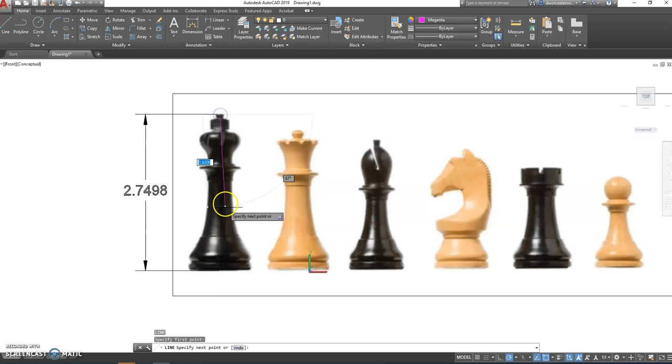So I went out to the internet and I just typed in chess set, and this is a pretty standard chess set. So remember your max height is 2.75 inches. So I scaled this to approximately 2.75 tall. And I'm going to come in here and just draw a line right down the middle of this. That is that 2.75 inches tall. So 2.75 to there. Now remember, the maximum diameter of this is 1¼ inches.

So our radius has to be less than 0.625. So right there, I am less than 0.625, so I'm just going to go to right there and draw that first piece in. Now, the next thing to remember is your fine detail is 0.05 inches. I'm just going to offset 0.05 to see what that looks like. I'm not selecting my right line. I got to get rid of this dimension. I'm going to offset the 0.05 up. And notice how small that is. Oh, wow, I'm way within specs there.

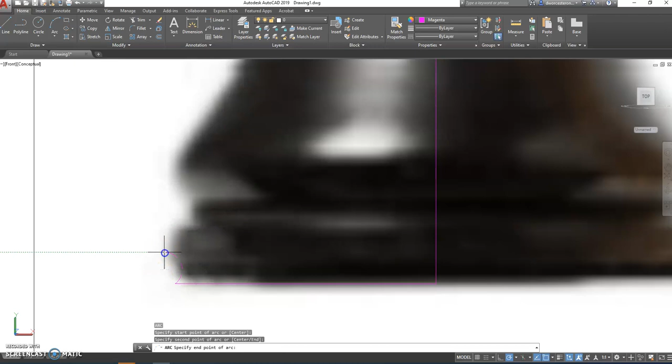So I can just go ahead and start drawing this thing, put a little arc there. It looks something kind of like that. I'm going to add in another arc. Looks something kind of like that maybe. I'm going to draw another arc. Come up to this section to here. Here it looks like it has a little bit of a flat spot on there. So I'm going to put a line across to there. Put in another arc up to maybe about here.

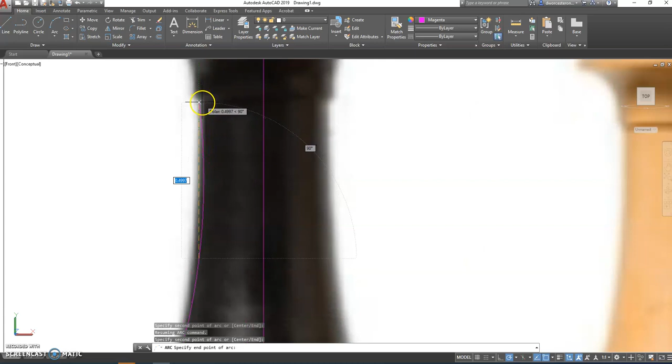Again, looks like a flat spot there, so I'm going to put a flat spot in, and then put another arc in. Maybe something about like that. Here looks like a flat spot again, so I'm going to come up, out to about there. Here, I'm going to offset again that 0.05 just to see. And wow, that looks like it's about the appropriate size. I maybe didn't go up quite tall enough there, but that's okay. I'm going to go ahead and fillet these two lines so it rounds off that tip of it.

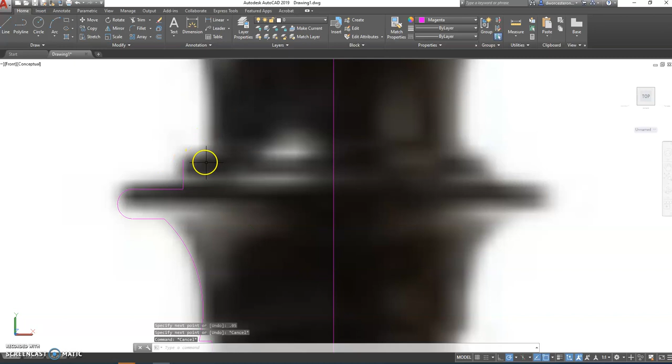I'm going to extend this line just a little bit, maybe to about there. Here, I think I'm just going to come straight up, and I'm going to go up that 0.05 to there. Oops, I don't know what I just typed. I'm going to try that again. 0.05 to there. And again here, it looks like it has a little bit of a flat spot, so we're going to come across here flat, and then add in another couple of arcs. So from here to here, maybe another arc going around this portion of it, and maybe one more arc up here on the top. All right, something about like that.

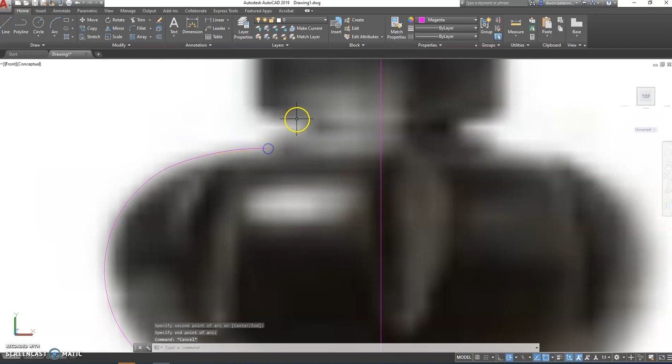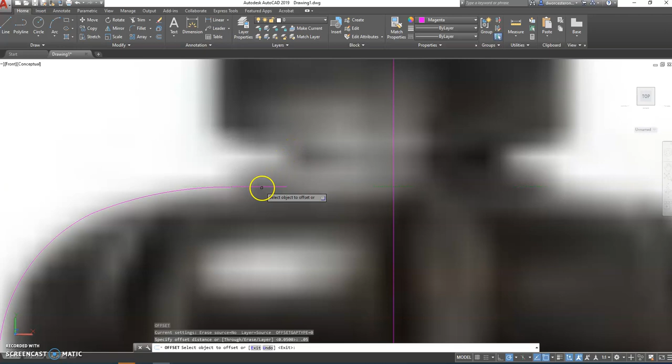Here again, I'm going to put a little short line here, I guess. Oops, I did not get that attached well. Let me try that again. From there over 0.05. Again, I'm going to try my offset of 0.05. And that looks about appropriate. A little bit bigger than that gap that's on there, but I think that's fine. I'm going to connect those two together with a line.

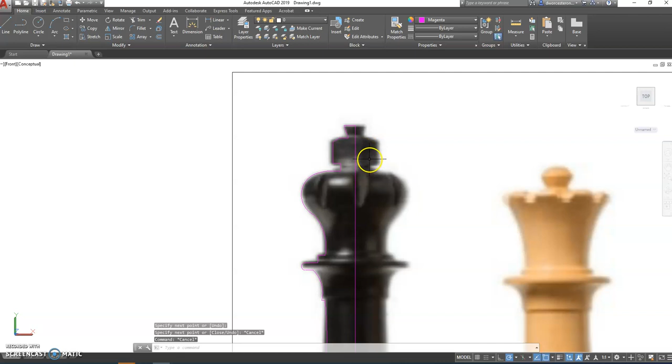And I think I'm just going to go kind of straight up on this one. I'm going to angle this one over a little bit, and over to about here. Well, first off, I'm going to make this piece over to about there, and then down to about there. All right, right there. That is a great looking profile. It's a little bit hard to see, so I'm going to copy this out to the side. And there's a great looking profile of this king.

I'm going to region this. Regions nicely. I'm going to revolve this. And there, that's revolved. That chess piece is finished. That chess piece is just great. That's going to totally be within specs. And you're going to have a chess piece that really looks pretty good that's finished.

Now, that took me 4 minutes and about 28 seconds with all that talking you through that. Granted, I maybe have a little bit more experience than you guys on this. But let's say it takes you 4 times as long. It takes you 20 minutes of following through this video. That's 20 minutes of finishing up this one piece. Then you have maybe another 20 minutes on this piece, another 20 minutes here, here, and here. That's 100 minutes worth of time to get this project done and get some points out of it.

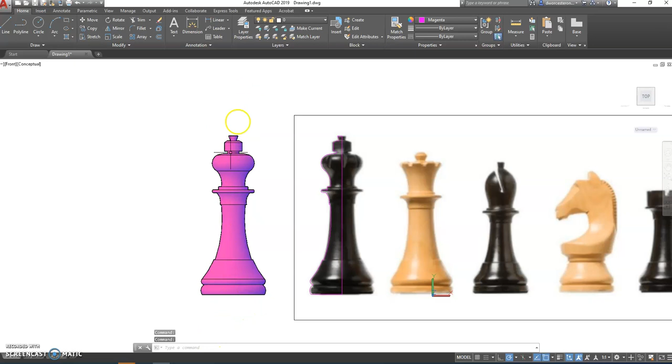Now, granted, this is going to be a little bit of a simplistic design. If it's like this and really looks pretty clean, that's only going to be a 0.9 modifier. You're going to get a 90% on this project. A 90% on a 50-point project is better than a 0% on it, and your parents will definitely agree with me. So try to get this finished up.

Obviously, here on the knight, you're not going to be able to revolve this piece. You may have to just come up to about here, and then just do this as a profile and extrude it out like 0.2 inches, and then attach it to your base, and you'll be just fine. A couple of these other pieces, if you want, you can subtract out the slot, subtract out some of these little pieces, subtract out the notches out of here, but you wouldn't even have to do that. If you finished it without that, you could still get that up to 80 or 90% credit for this project.